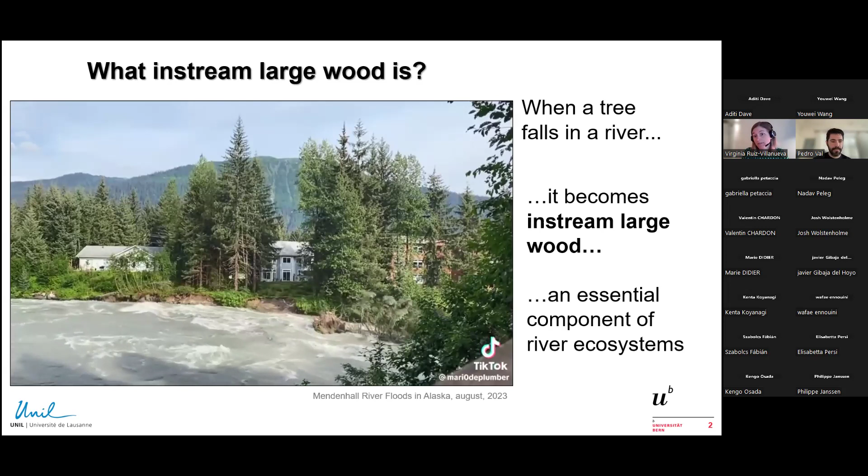So before I start talking about in-stream large wood, I want to tell what in-stream large wood is. So when a tree falls in a river, like you see in this video from Alaska, it becomes in-stream large wood, and it becomes also an essential part of river ecosystems as the wood influences the river processes, forms, and functions.

So in this talk today, I will briefly show you the most relevant biophysical functions of wood in rivers. Then I will focus on the origin and supply processes of wood to rivers, and I will show you how we can quantify and model these processes. Then I will present our monitoring and quantification of wood transport approach and how we quantify and monitor how wood moves in river channels, particularly during floods. And finally, I will talk about the potential impacts and hazards related to the transport of wood during floods, focusing on the interaction between wood and infrastructures.

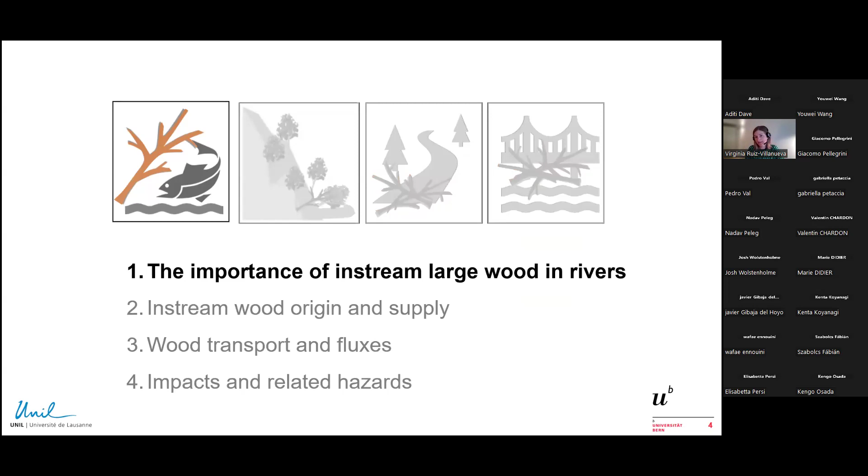Wood influences the deposition of sediment and the sediment grain size. And so these effects have an influence on the channel patterns, such as modifying channel width and enhancing the lateral mobility. And at the river scale, wood improves channel floodplain connectivity, increasing overbank inundation. So these effects are not only local and short-term effects, but wood influences processes, forms, and functions across diverse spatial and temporal scales. And as a result of these processes, wood enhances the physical complexity of rivers, increasing biodiversity.

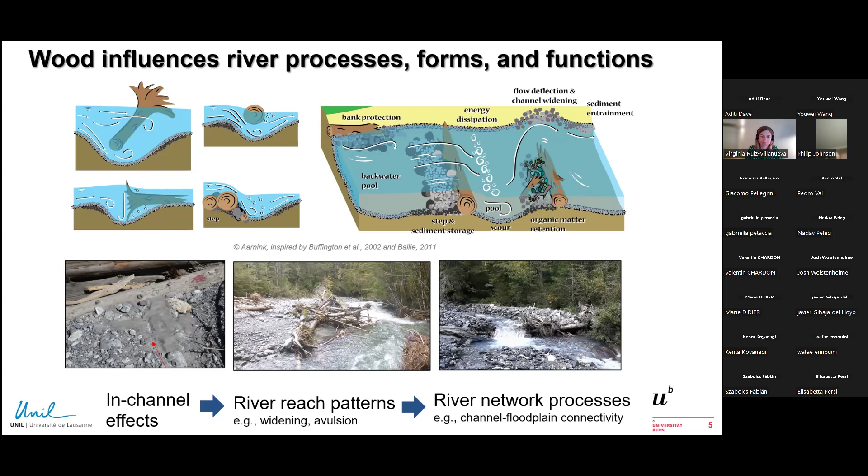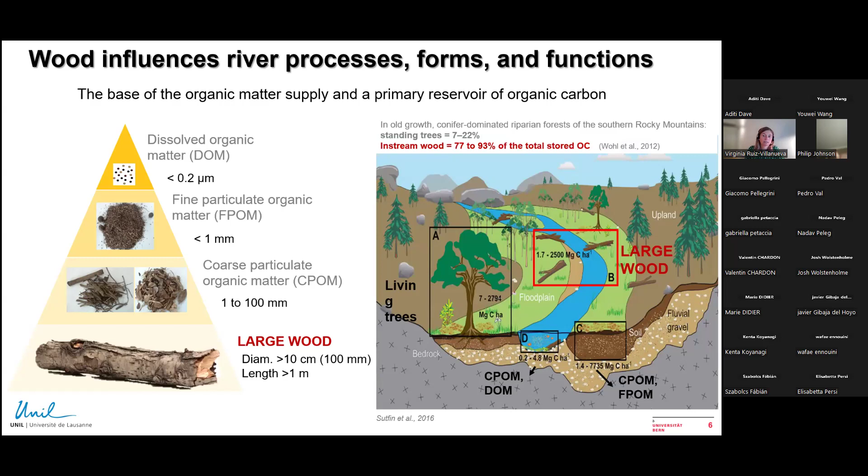So the species that can be attached to the wood might be dispersed, for example, during floods, and then survive the flood. As you see in this video, taken after a flood in a river in Switzerland, it is full of macroinvertebrates. So the interaction between the flow, the sediment, and the wood produces better conditions for these macroinvertebrates, but also fish, enhancing habitat for many species. Wood supplies food, shelter, spawning, and nursery areas. But wood also influences the establishment and succession of riparian vegetation and the development and evolution of islands. So in summary, wood influences the entire food web, improving the river's biological and ecological diversity.

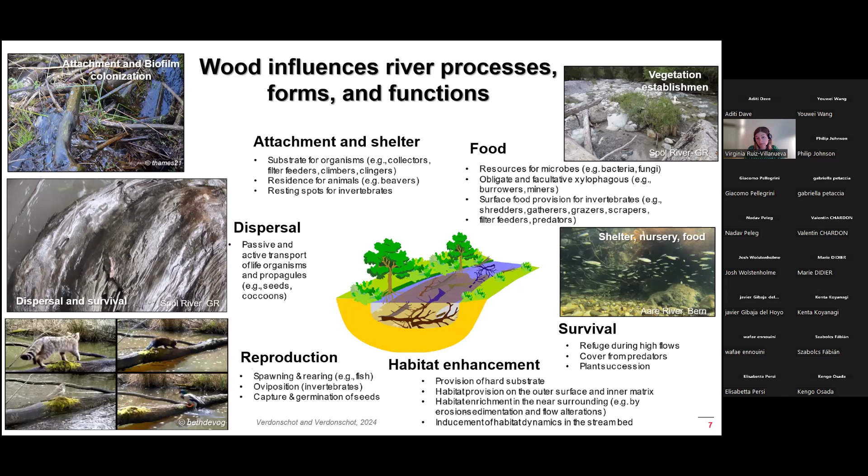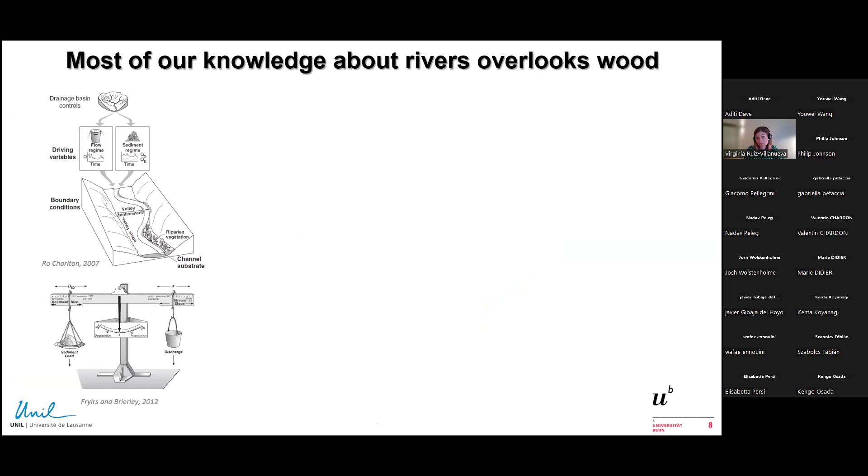Still, despite the important role of wood in rivers, most of our understanding of rivers is still based only on the flow and sediment regimes. It is only recently that we started to acknowledge the fundamental influence of vegetation. However, wood is equally important. And together, the three regimes, the flow, the sediment, and the wood, sustain and regulate the river's physical and ecological functions.

So like the flow and sediment regimes, the wood regime consists of the wood supply, transport, transfer, and storage. And it can be characterized in terms of frequency, magnitude, and timing. But unlike the sediment and flow regimes that have been studied for decades or even centuries, much less is known about the natural wood regime. And so only few sites have been monitored, and only single aspects of the wood regime, for example, the storage, are usually quantified, if they are quantified at all.

So, for example, wood transport remains still very challenging to quantify. And this is because, like sediment, wood is transported during floods, and this makes the monitoring of wood transport very challenging. So data is very scarce. And when we look at the amount of wood that is transported during floods, this is what you see in the graph. So in the y-axis, you have the volume of wood exported or transported during single events, plotted here versus the drainage area.

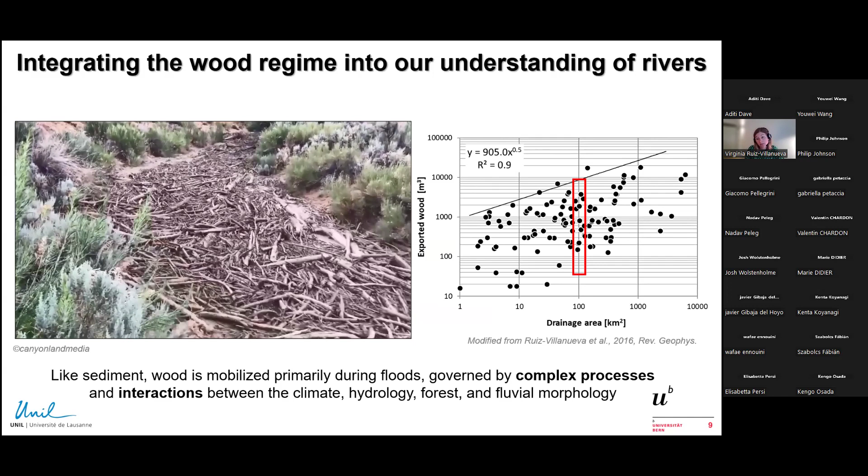And so what we can see is that the scatter, or the variability in the graph, is very high. And this means that similar rivers of similar sizes or similar hydraulic conditions, if we take the drainage area as a proxy, may result in a very wide range of wood transport. And this is because wood transport is a complex process, and it varies significantly within fluvial systems, as it is controlled by the interaction between the climate, the hydrology, the forest, and the fluvial morphology. So the wood regime provides us a valuable framework to enhance our understanding of rivers in general.

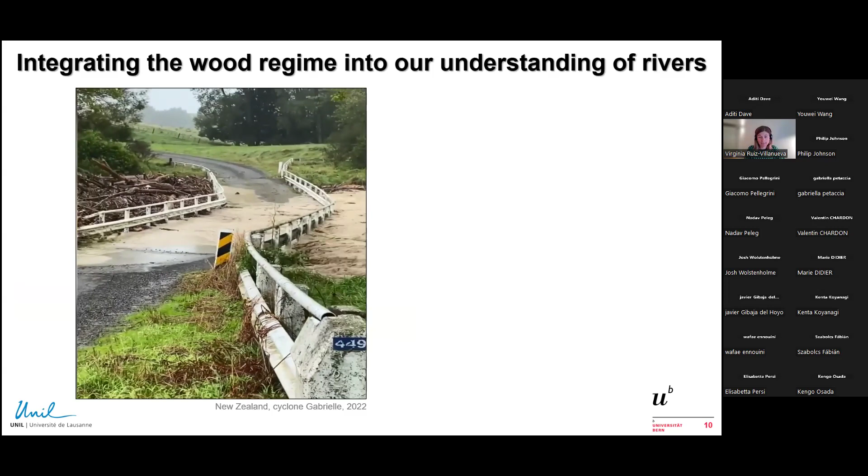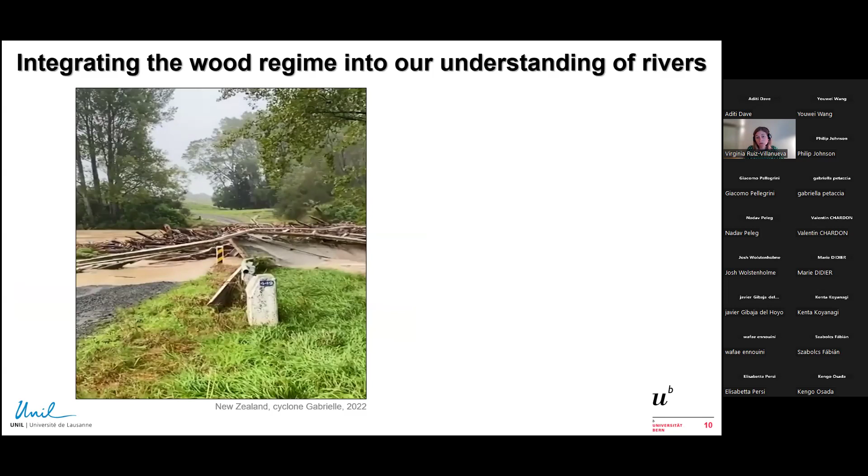But the transported wood may also cause hazards. So it may accumulate at critical sections like bridges, like this video is showing in a flood in New Zealand a couple of years ago. Also the accumulation and eventually the collapse of the structure, of course, may increase the negative effects of the flood. So although it's important to stress that none of the dangers posed by the wood are inherent to the wood itself, but to the obstacles and infrastructures that are not designed to allow this wood to pass, we should also integrate the wood regime into river and flood hazard assessment. But still, this is very rarely considered.

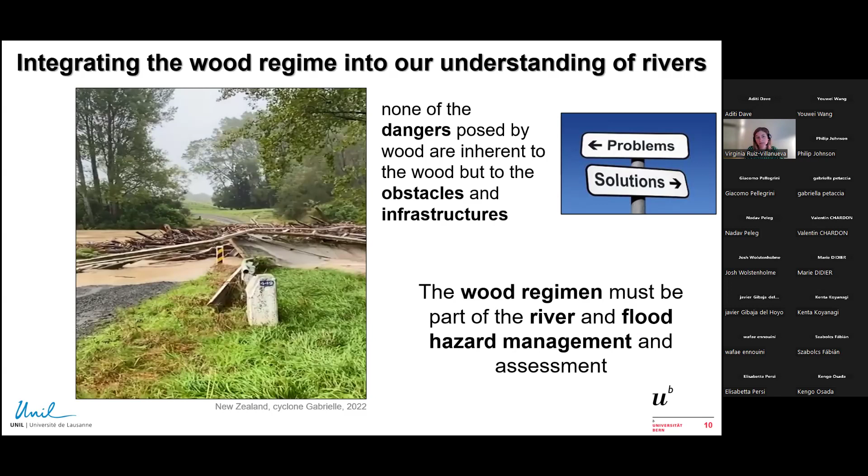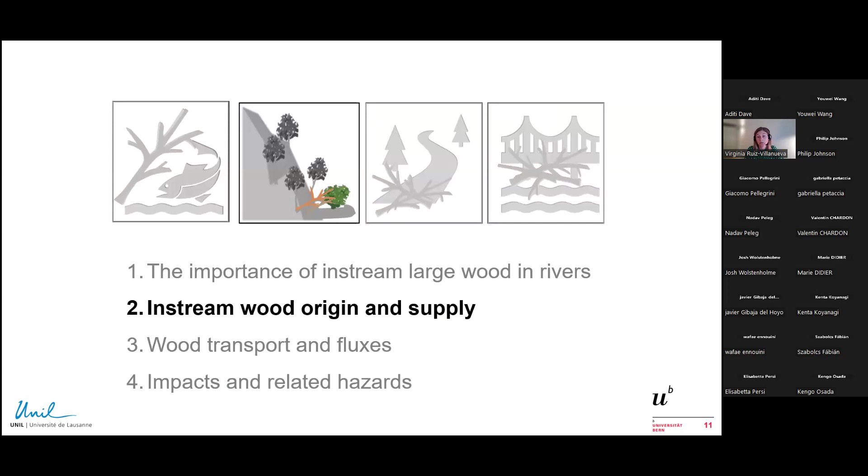So the very first question that we ask when we see a video showing transport of wood is where does the wood come from and how it is supplied to the river. So in mountain rivers, wood is usually recruited or supplied by landslides, debris flows, and fluvial erosion. And these are very complex processes that show a large spatial and temporal variability, varying from one river to another, and this makes wood supply predictions very challenging.

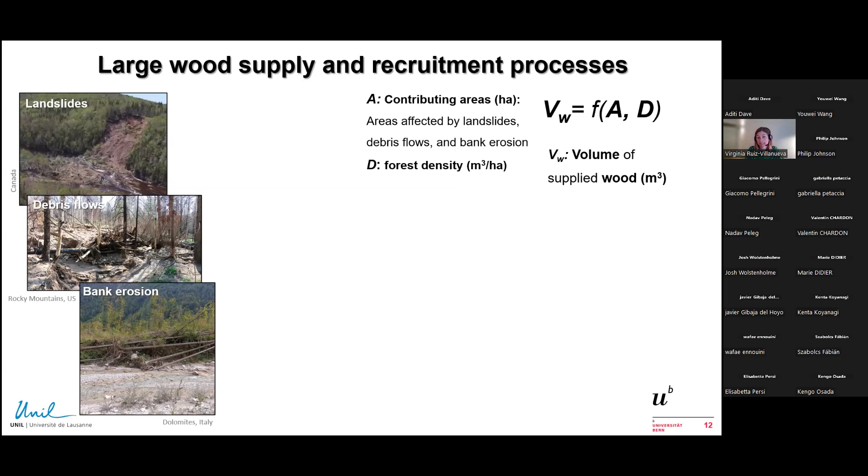But if we know the areas that are prone to these processes and overlay this with the forest density, here in the equation D and A, then we can estimate how much wood the catchment may produce. However, there is no single model that can simulate all of these processes together accurately. So identifying these contributing areas remains challenging. And so what we did was to combine existing high-resolution geospatial information that we have available in Switzerland of areas prone to these processes, so landslides, debris flows, and bank erosion. And we combined this in a GIS environment and applied a fuzzy logic to estimate the wood volumes. And we did this for different frequency magnitude scenarios, from frequent to rare scenarios.

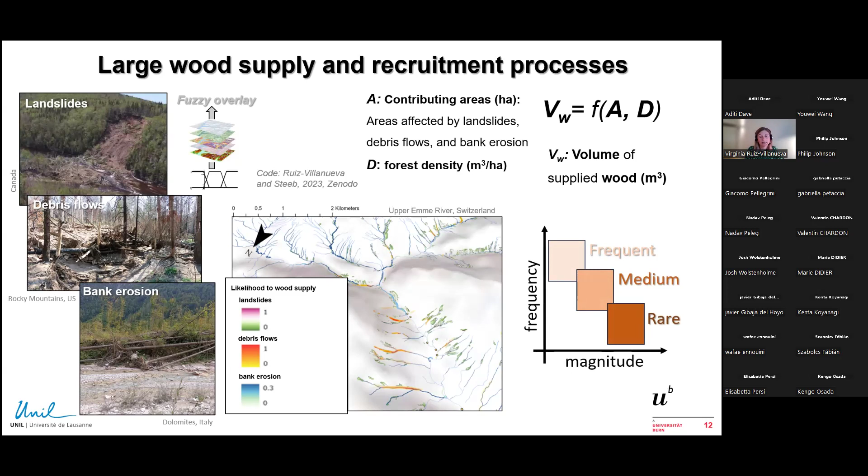So the importance of debris flows and landslides increased for the low frequency and high magnitude scenario. And this was also particularly so for smaller catchments. So still in larger catchments, only a small proportion of landslides may supply wood during extreme events, and bank erosion remains the dominant process. But this showed clearly that the dominant wood supply process varies according to the catchment size and also the magnitude-frequency event.

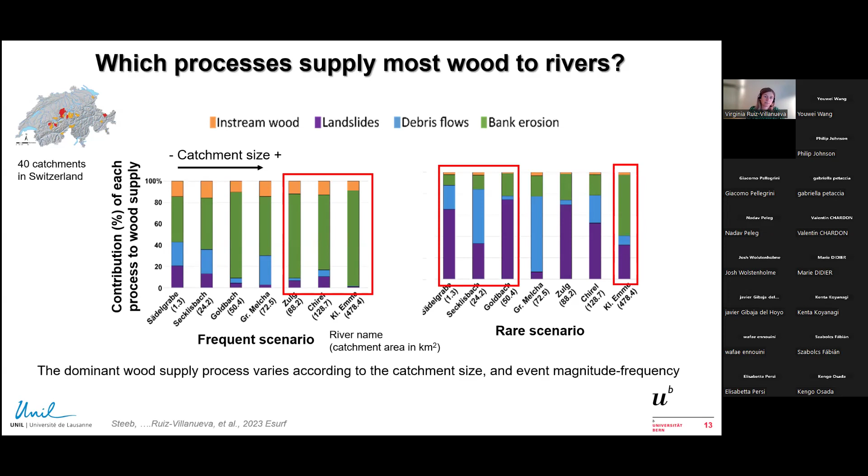In mountain rivers, we also observed that there are other processes that might be important to supply wood to rivers, like snow avalanches or tree mortality. So we tried to quantify them as well. So we applied the same model, considering these two processes in one single catchment, and assuming also that avalanches may only happen at low frequency, while tree mortality is a high frequency process. So we compared the estimated volumes provided by these processes and the other processes as well, so landslides, debris flows, and bank erosion.

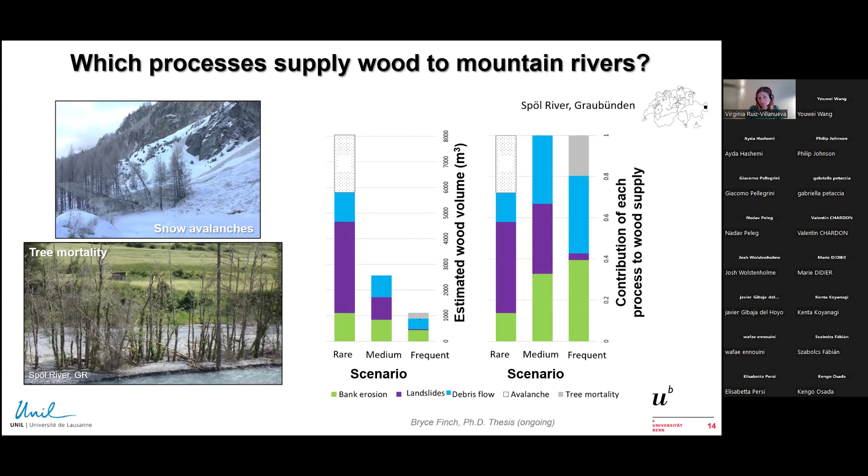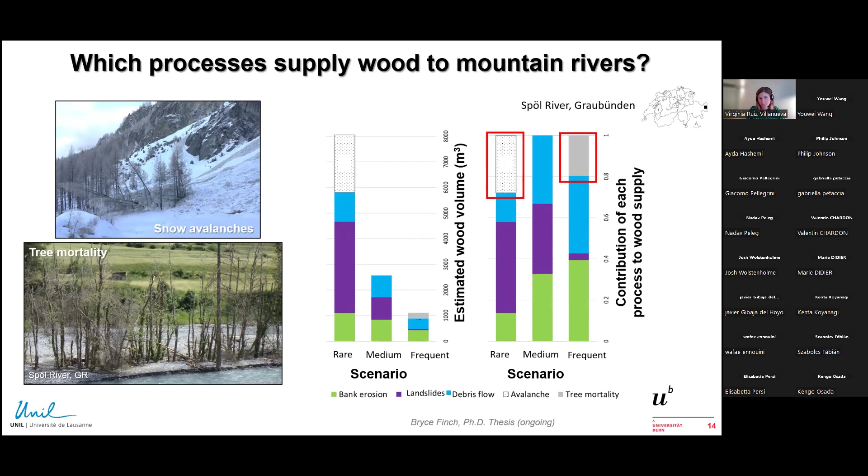And in these graphs, you see the estimated total volume in cubic meters, but also the contribution of each process to the total wood supply, or the total estimated volume. And so what we could see indeed is that these processes may contribute to more than 20% of the total estimated wood volume. So these are important processes in alpine rivers.

Of course, this was a simplified model, so we wanted to validate or to compare with observations. And fortunately, we have a unique database in Switzerland that was compiled after important flood events. So we compared the model results with these estimated volumes after these events. And although in general the model gave us similar values, what we can see is that the model in general overestimated the volume of wood supplied by each catchment. And this is, of course, explained by the fact that the model takes all the areas prone to the different processes and computes the volume in all these areas, while during a single event, only some of these areas will be activated and will supply wood.

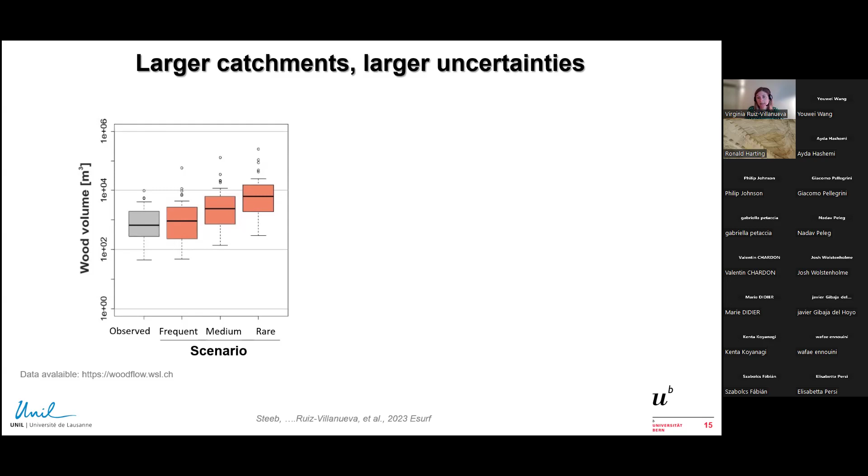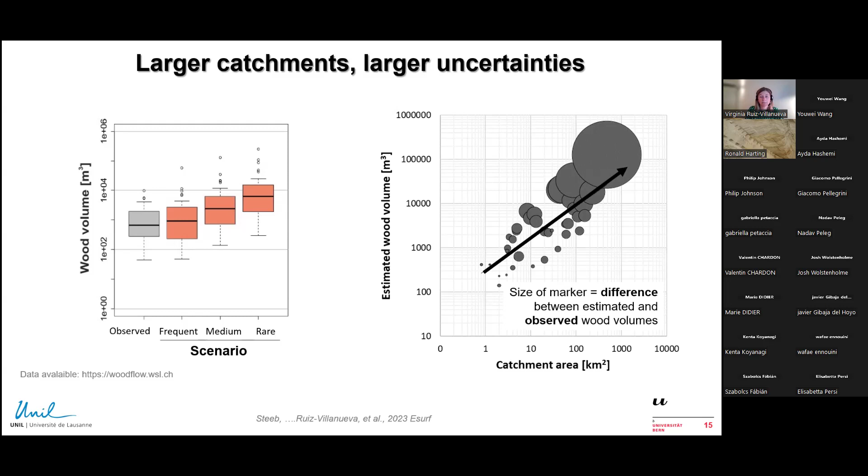And so all the wood arriving to the dam comes from two main tributaries, the Arve and the Valserine. And these two tributaries are very different. So the Valserine drains the Jura Mountains made of limestones, and the catchment is up to 70% forested, while the Arve drains the Mont Blanc Massif in the Alps with crystalline rocks and 6% of the area glaciated, and is only 40% forested.

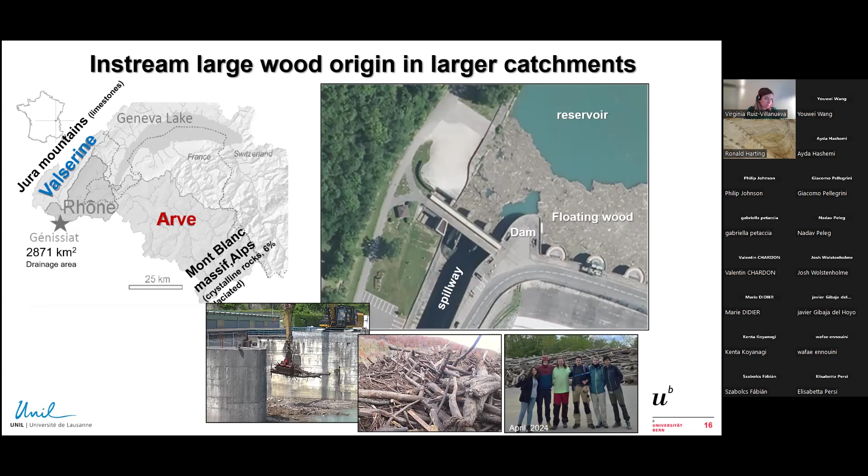So when there is a flood, all the wood that arrives to the dam has to be extracted. So the dam managers take this wood, they pile the wood nearby, and then we go and take all the samples we want. And so we look at the wood at different scales. First, we look at the species distribution, because this will give us an idea about the provenance across the riparian buffer. So we know that conifers may come from farther away, while Salix willows may come from just nearby the channel.

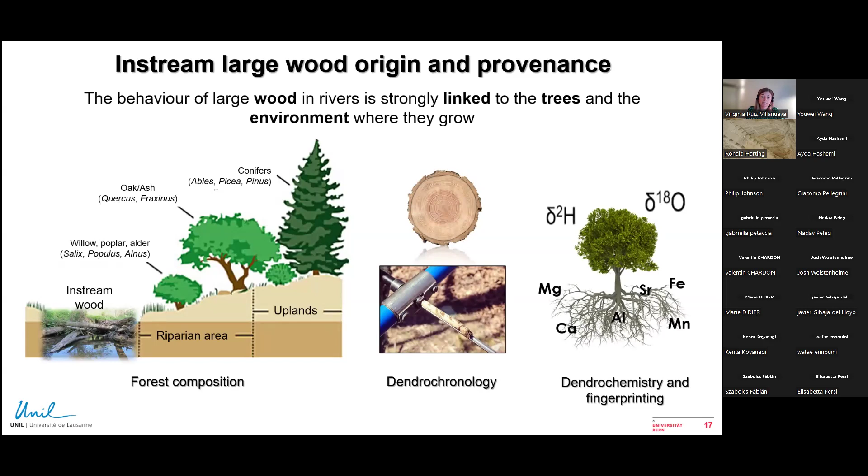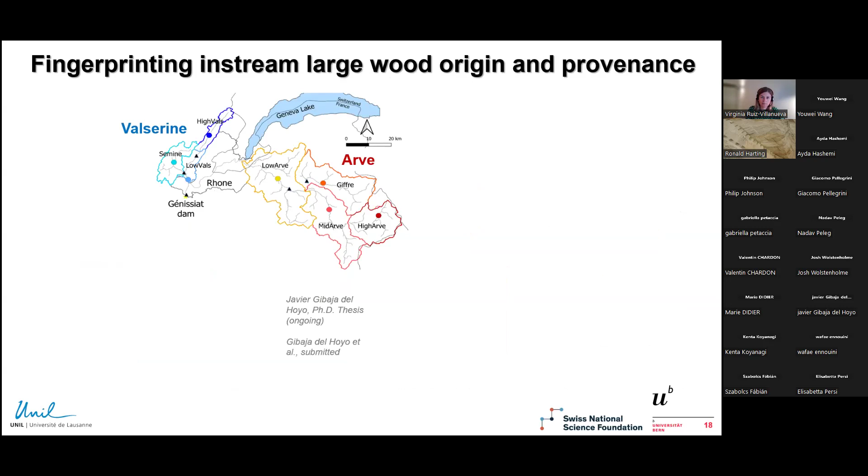But we also look at the other characteristics of the wood, because the trees record specific characteristics from the environment where they grow. So we apply dendrochronology and dendrochemistry, and we analyze the water-stable isotopes, hydrogen and oxygen, and minor and trace elements in the wood cellulose. And thanks to this, we can infer the origin of the wood that arrives to the dam. So for example, the isotopic signal of the hydrogen and oxygen, which is linked to the source of the water and the hydrological and climatic conditions where the trees grow, allowed us to distinguish between two major tributaries, so between the Arve and the Valserine.

And this was like this mostly because of the presence of the glacier in the Arve subcatchment, which related to the lower values in the hydrogen isotopic signal. But when we looked at the chemical composition of the wood, this allowed us to zoom in and go much more in detail. And so we could distinguish not only among the two tributaries, but also within different parts along the two subcatchments. And we could infer where the wood that we extracted from the reservoir came from.

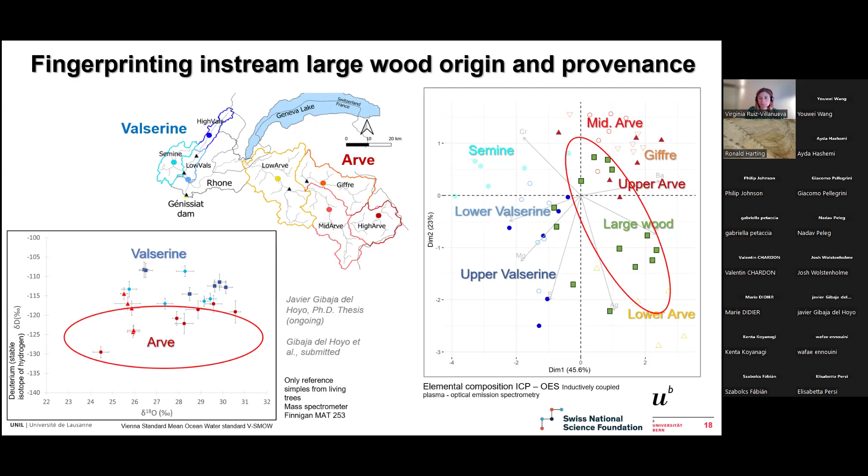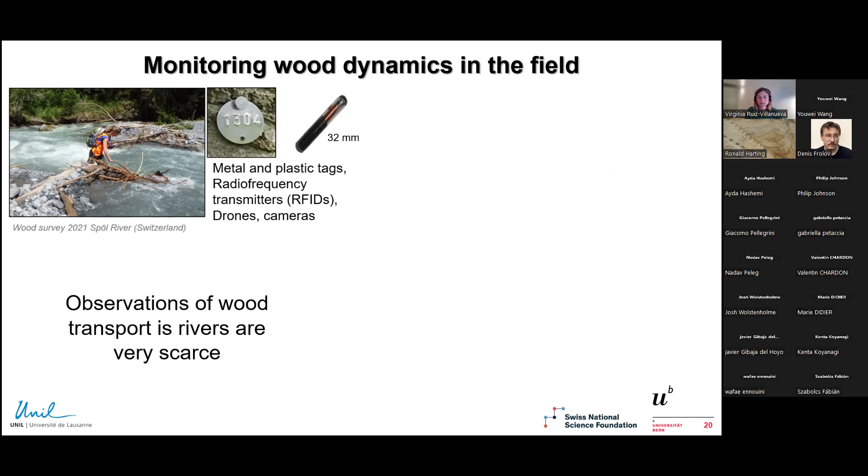So once we know where the wood comes from, then we want to understand how it is transported, how much wood will move and how it will move. And so to do this, we monitor wood in several rivers, because observations of wood transport, as I said at the beginning, are very scarce. So we do field surveys, we tag and track pieces of wood in different rivers. And as it is done for sediment, we use tags, but also radio frequency transmitters.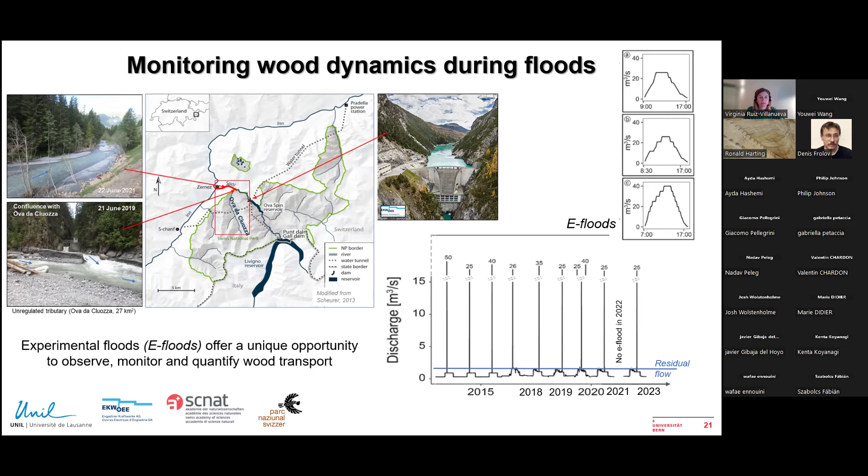So here I will show you results from the past 5 years and the past 5 experimental floods. So after 5 years, we observed that wood entrainment, so the number of pieces that are actually mobilized during these floods, is relatively low. And so these are the bars in green in the graph. So they remain below 20% of the total number of tracked pieces. Although we also have about 20% of pieces that we couldn't find after the floods. So the actual transport might be even higher than we think. But still, what we can see is that there is a trend in the transport. So there is an increase in the number of pieces that are moving every flood.

And then if we group the pieces of wood according to their conditions, so for example, if they are buried or not, if they have roots or not, according to their orientation or the decay state, we also see this trend. So in these graphs, you have always the proportion of pieces classified according to these conditions: burial, roots, orientation, and decay. The colored bars are related to pieces that moved and we could track, so we could find after the floods. And the grayscale bars are pieces that didn't move.

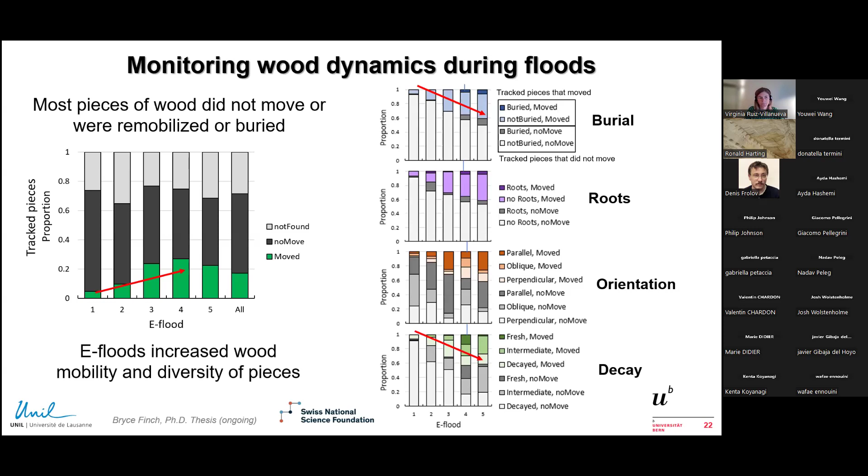So then we also wanted to know how far the wood traveled. And so for the pieces that we tracked and could find after the floods, here we plotted the probability to travel a certain transport distance. And so in general, we see that the probability to travel very long distances, so distances longer than 1 kilometer, remains very low. However, if we include in the analysis the pieces that we could not find, and we assume they traveled downstream from the studied reach, then the probability increases quite a lot. And we see that distances longer than 2 kilometers are still not that low.

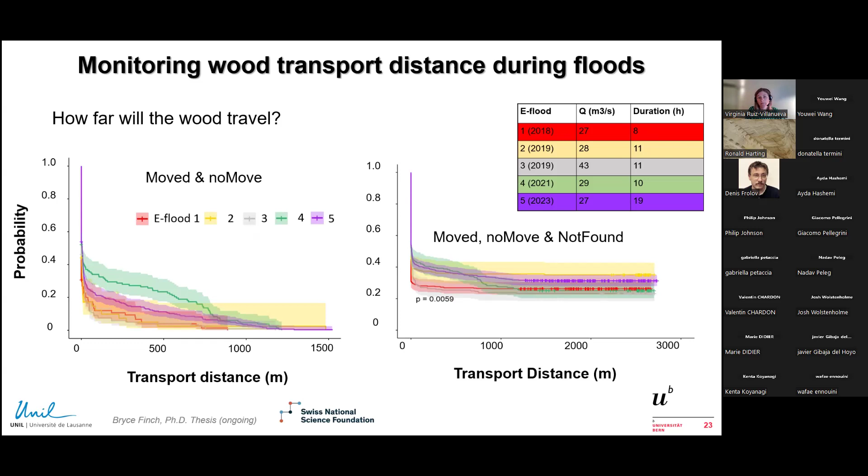So we wanted also to understand the fluxes. So during the floods, what is the rate of wood transport? So in this graph, you have the hydrograph of the flood in blue. So discharge versus time, and then the number of pieces that were passing by a certain section of the river. So what you can see is that most of the wood was transported at the very beginning of the flood, so during the rising limb and during the peak. And then there is not much transport afterwards during the falling limb. And this shows a clockwise hysteresis loop, as has also been observed for sediment transport.

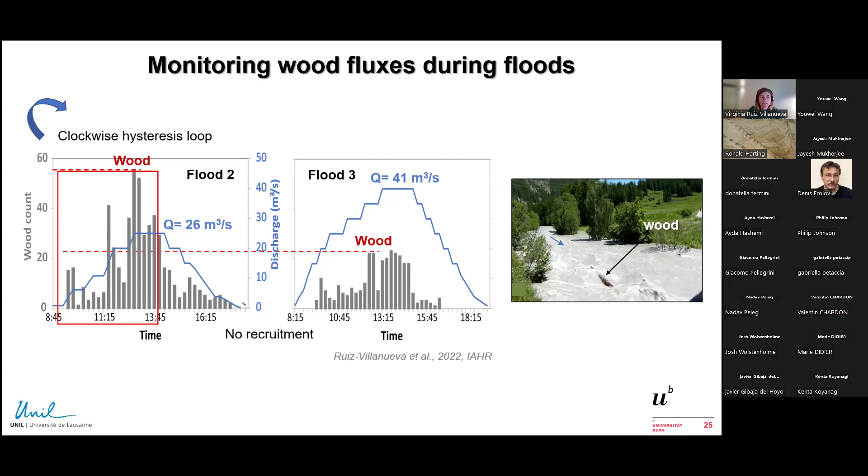And so if we compare to the following flood, so these were 2 consecutive floods that happened in the same year. Although the second flood had almost twice the discharge of the first one, we can see that wood transport was much less important during the second one. And so this is also because in between these two floods, there was no additional wood recruitment. So all the pieces that were in the river and were available to move were already transported during the first flood, and only some remaining pieces were mobilized during the second one. So this clearly shows that the flood history and wood availability are key.

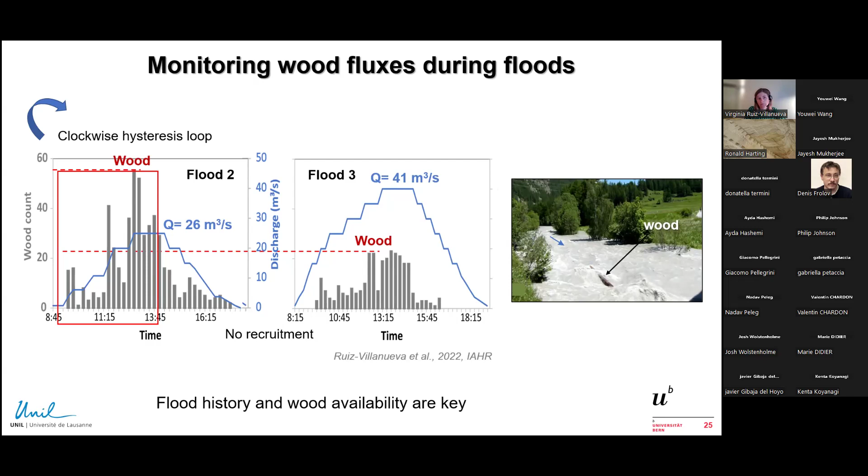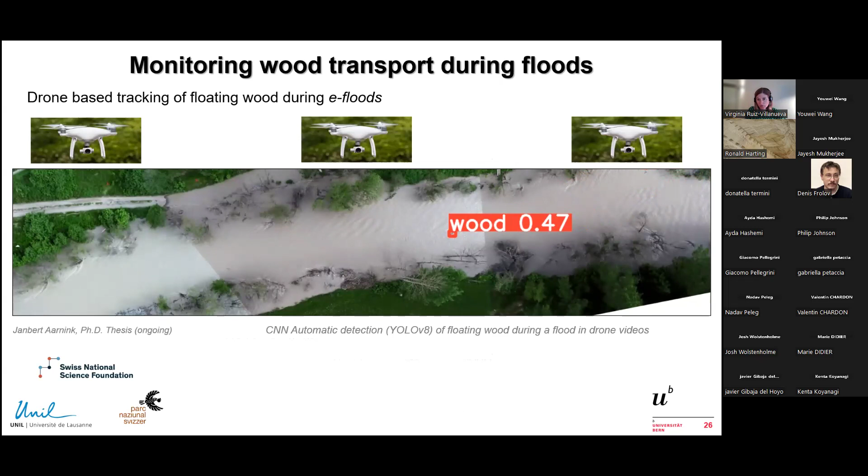And so these floods also gave us a unique opportunity of tracking and monitoring the wood during the floods. And to do so, we combined several drones and we tracked the pieces of wood applying this machine learning algorithm that I showed you before. And so when doing that we could analyze in detail, for example, the trajectories of the wood, but also, as you will see in this video, how the wood is rotating, how it is interacting with the river banks, with the river bars, and with other pieces.

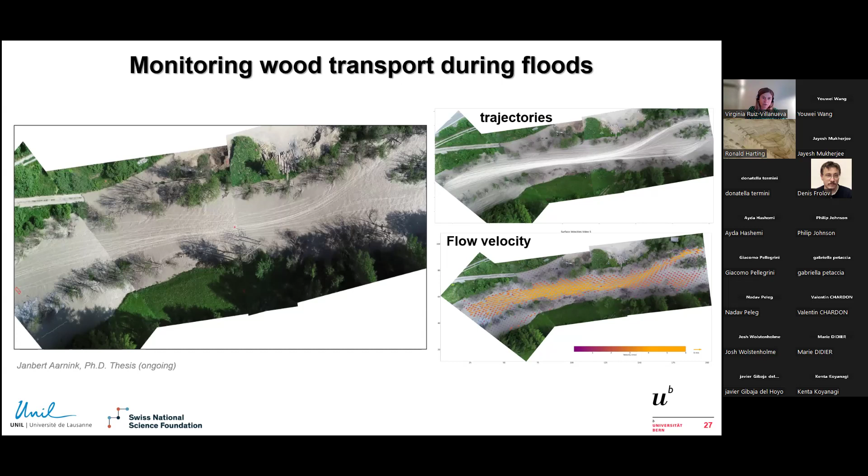So this is still data that we are analyzing, but this will give us wood trajectories, the wood velocity. We can compute the drag forces, the rotation. And so this hopefully will give us very interesting information about the motion of wood during floods.

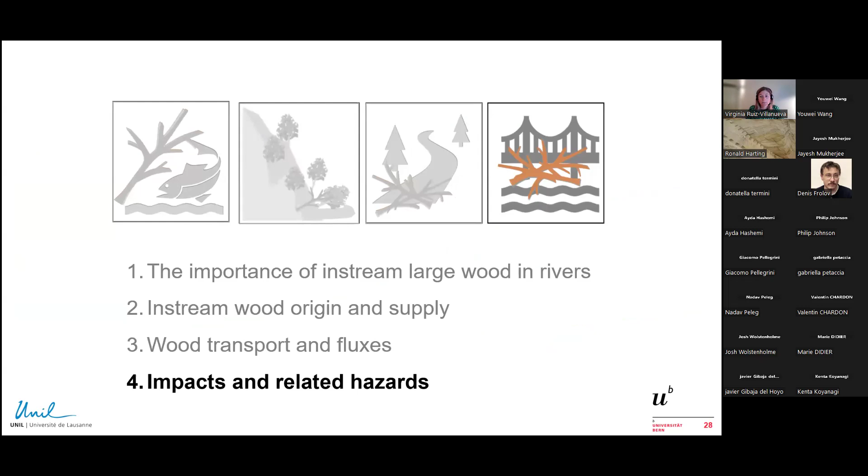So the last part of the talk is related to the hazards associated to the transport of wood. And so to do this, we use a numerical model. To explore wood transport, we developed some years ago a numerical model that couples the hydraulics and the in-stream wood transport. So the model is called Iber-Wood.

Iber solves the two-dimensional shallow water equations, the Saint-Venant equations, and applies the classical sediment transport equations for bed load and suspended load. And Iber-Wood includes a Lagrangian approach, which simulates individual pieces of wood with and without roots as discrete elements in the domain. So this model was developed and validated using data from flume experiments, but also data from the field.

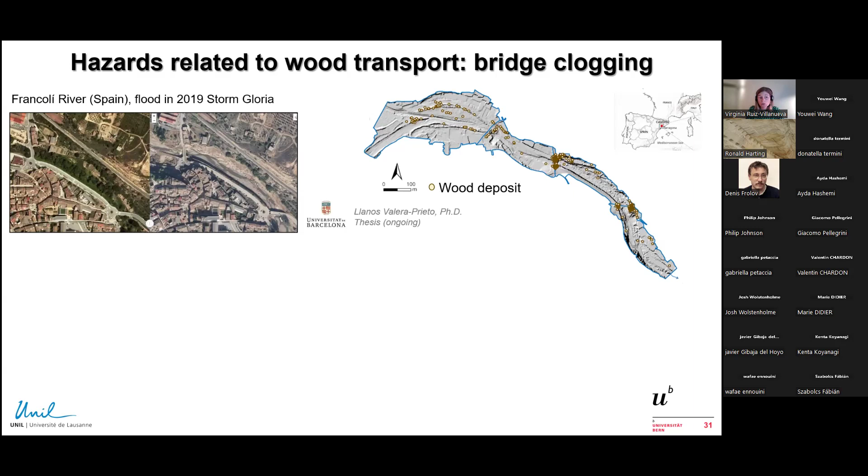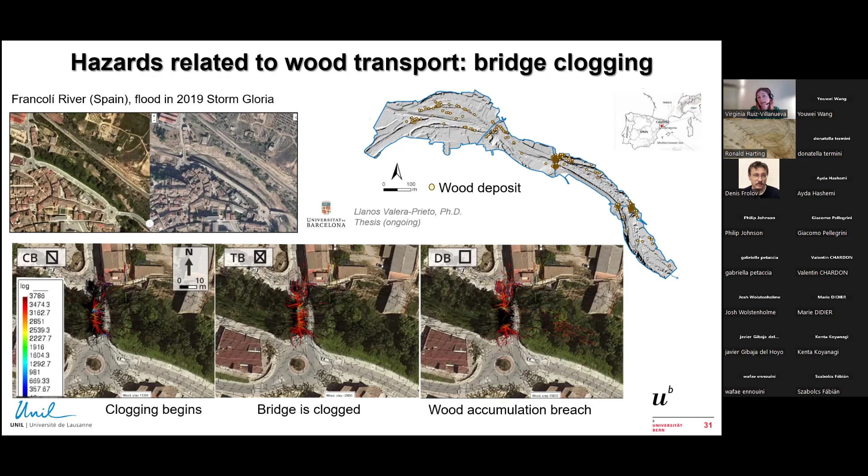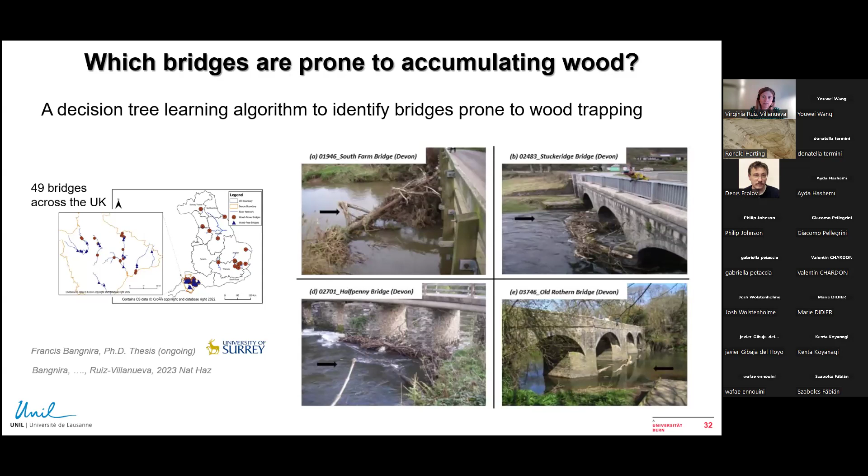So what is very important in terms of flood hazards and wood transport is identifying the bridges that might be prone to trapping wood. And this is what we did using a database from different rivers in the UK. So we collected information of 49 bridges across the UK, for which we had data about the history of wood trapping. And then we compiled variables related to the bridge geometry, so the number of piers, the geometry of the piers, the bridge span, but also characteristics of the catchments or the forested area and the channel morphology, for example, the slope, the channel width.

And with this information, we trained a decision tree algorithm, splitting the data into training and testing. And this decision tree identified the bridges that were prone to wood trapping and bridges that were not prone to wood trapping. And the prediction efficiency for the testing subset was 60%, which was very encouraging.

So we decided to test the model in the Francolí River, the river I showed you before, located in Spain, that was affected by this flood a few years ago. And so here we built a similar database. There were 23 bridges along the 30 kilometers river reach that was affected by the flood.

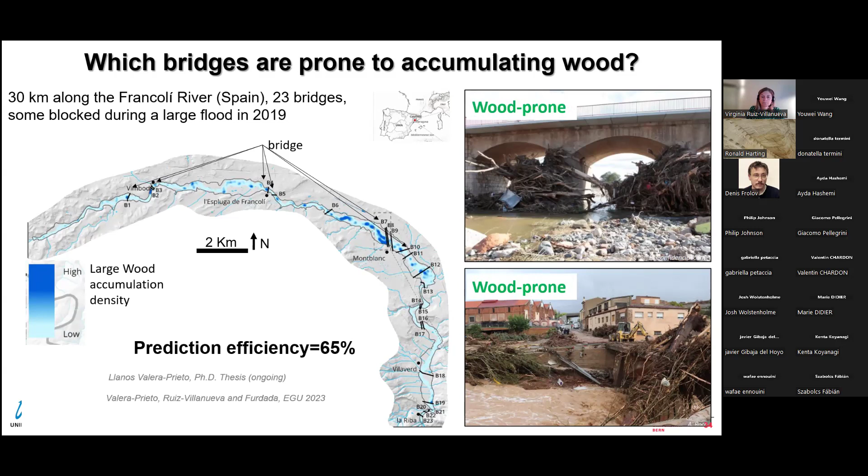And with this data, we applied the exact same decision tree that we trained with the data from the UK. And the model successfully identified 65% of the most affected bridges as prone to accumulate wood. So now the next step is to combine these two data sets and obtain an improved and more efficient decision tree algorithm that might be able to identify bridges prone to trapping wood in a more general manner.

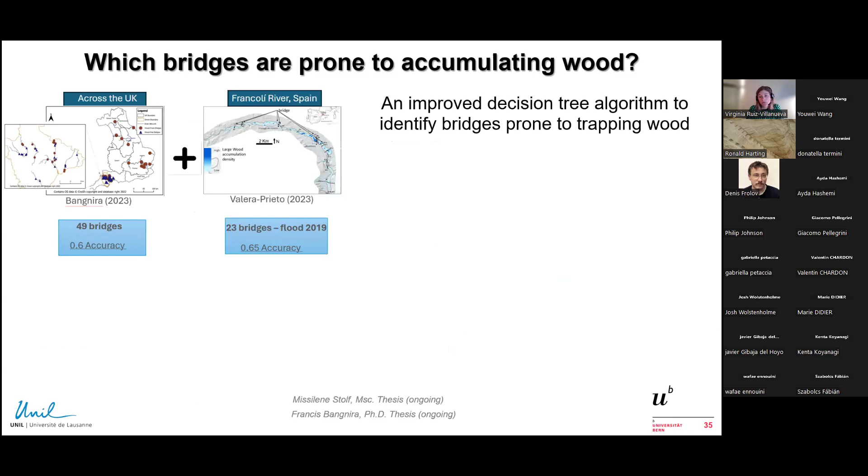So when we combined the two data sets and trained a new algorithm, we obtained efficiencies of about 80%. And also, if we look in detail at the confusion matrix, so the errors of this model, we see that the model only failed in one case to identify a wood-prone bridge.

Still, this database is small and limited to the bridges that we had data from. So we would like to continue this work and expand the database, and we are now developing a random forest algorithm with multiple trees that hopefully will be more efficient and can be generalized to any bridge or any river.

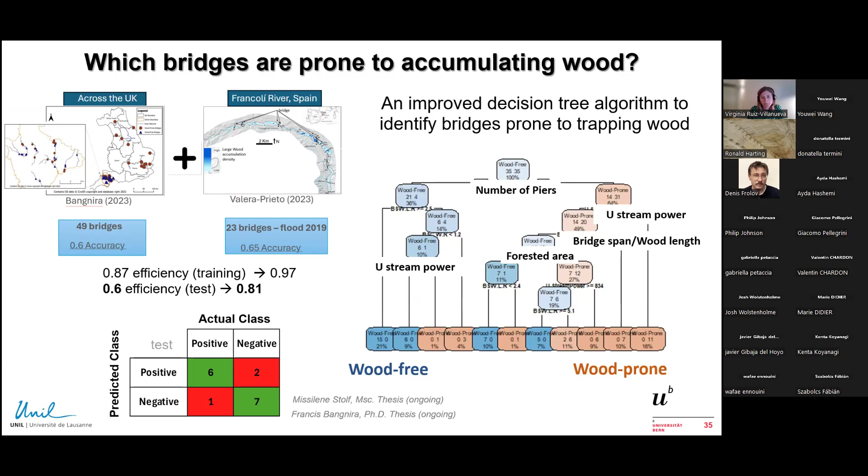So just some take-home messages to finish. The first one is that instream large wood is a natural and functional component of healthy river ecosystems, and it is as important as the flow, the sediment, and vegetation. And the wood regime is a very valuable framework for assessing and managing rivers and must be included in our understanding of rivers, but also in the flood hazard assessment.

Still, further investigation on the sources of large wood, the supply processes, and wood transport is needed. And one key aspect is monitoring. And now we see that monitoring wood with cameras is a very powerful technique. So we could expand this and monitor wood in many rivers.

And an important point is that wood in rivers research requires a cross-discipline collaboration. So you have seen that we combine very different techniques. So this multidisciplinary approach is also important. And with this, I thank you for your attention and will be happy to answer your questions.

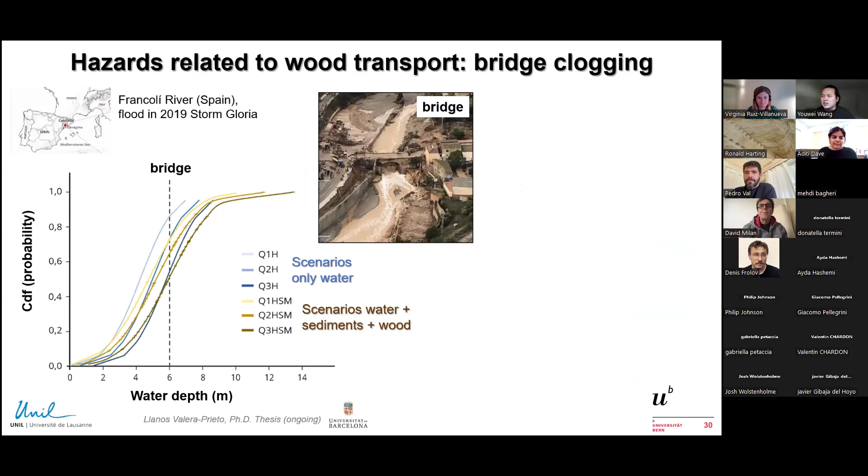So we do have a question in the chat, and maybe Yue, you want to take that question from the chat? Okay. So the question is from Luca. The question is regarding the mobilization of wood of different size at a similar peak flood discharge. It might be on slide 24. So Luca asks, is this linked to a critical discharge beyond which the coarse bed becomes mobile and frees wood? Yeah, thank you for this question.

Yeah, that's a very good question. So this is also something that we would like to explore more. So the threshold, the discharge threshold for wood to start moving is related to the previous flood that transported and deposited the wood. But of course, for wood that is buried, this threshold may be related to the threshold for bed load. And so in the Spöl, we have several sites where we observe pieces of wood being buried and then released after the flood. So we would like to explore this more in detail. Yes, but this is indeed a very interesting question. Thanks.

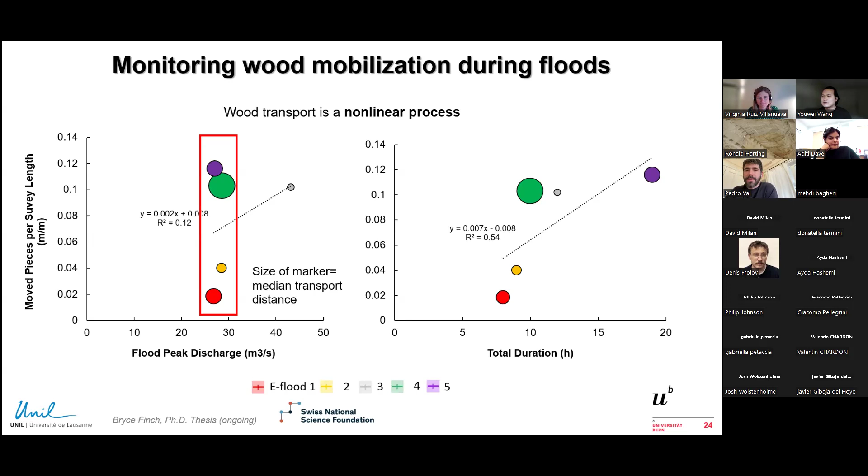Okay. It seems like we also have another question here. Daniel Scott says, thanks for the excellent talk, Virginia. From a practical standpoint, I'm wondering about the effort required to set up and run Iber-Wood for a bridge like the one you showed on slide 30, compared to just setting up and running a hydrodynamic model. Could you give a rough estimate of how much more time it took to set up the model that included wood as well? Rough estimate is fine, 2 times as long, 10 times, 100 times.

Yeah, that's a very good question also. So I think the most demanding in terms of time is setting up the hydraulic, also the input data for any hydraulic model. So to get the topography for the calculation mesh. And in this case, the geometry of the bridge is very important. So whether you add wood or not to the simulation, this requires some time. And this is, in my opinion, the most demanding task. Then the addition of wood depends on the data that is available. You can always design different scenarios. So adding wood to the model itself requires 5 minutes, 10 minutes, if you have the data already, or if you have designed the input wood in advance. So the model itself is relatively user-friendly.

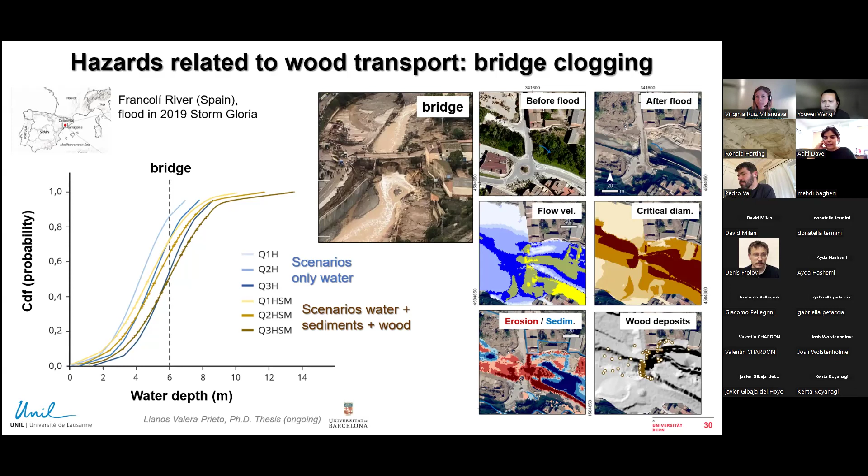Yes, so we saw this, for example, in the decision tree. One important bridge characteristic is the number of piers within the channel. So the more piers, the higher, let's say, susceptibility to trap wood. The shape of the bridge pier, we have observed also with flume experiments and with numerical modeling, may influence the probability to trap the wood in transport. And then, of course, the span, so the width, and the freeboard, the height of the bridge, are very important. Yes, so the geometry, that's the main, let's say, the main problem is not the wood, it's just the way the structures are designed that are not allowing the wood to pass through.